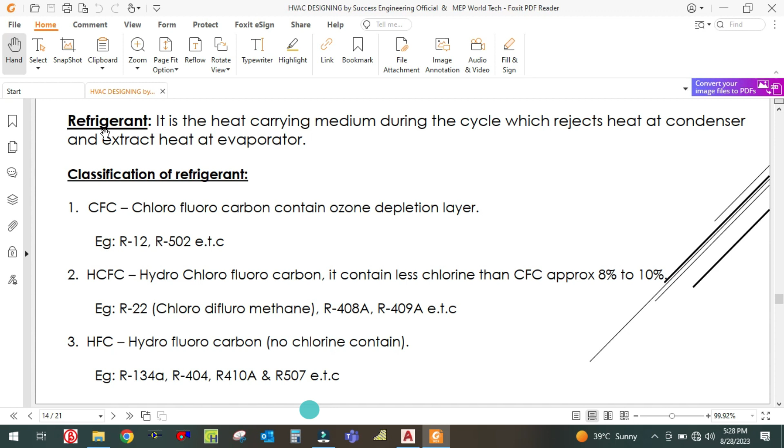As you can see here, this is refrigerant. What is refrigerant? Refrigerant is nothing but the heat carrying medium. It will carry the heat during the cycle, rejecting heat at the condenser and extracting heat at the evaporator. The AC works on a vapor compression cycle. This refrigerant fills the pipe, and it carries the heat during the cycle: at the condenser it rejects the heat and at the evaporator it extracts the heat.

The high pressure, high temperature refrigerant is discharged by the compressor and sent to the condenser. At the condenser it rejects the heat, because the condenser fan runs, pulls the outside air and throws it on the condenser coil. During this process the high temperature refrigerant rejects the heat and changes its phase from gas to liquid. Then it passes through the expansion valve and enters the evaporator, where it extracts the heat.

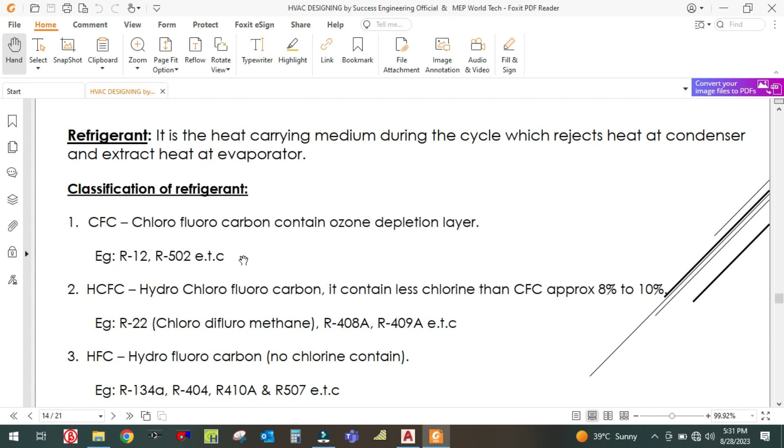Next one is HCFC, hydrochlorofluorocarbon. It contains less chlorine than CFC, approximately 8 to 10% less chlorine than CFC refrigerant. Examples of HCFC are R22, which is chlorodifluoromethane, and R408A, R409, etc.

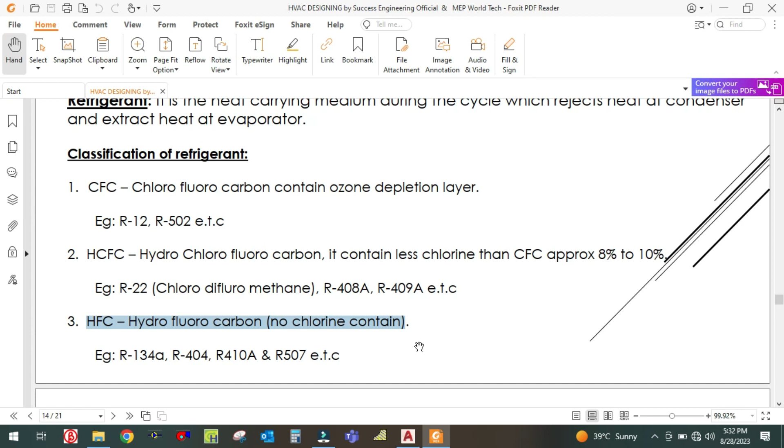And the third one is HFC, hydrofluorocarbon, with no chlorine content. Examples of HFC refrigerant are R134A, R404, R410, etc. This has zero ozone depletion since there is no chlorine, which means it will not affect the environment. So mostly nowadays we are using HFC refrigerant. R134A, also known as tetrafluoroethane, is from the HFC family.

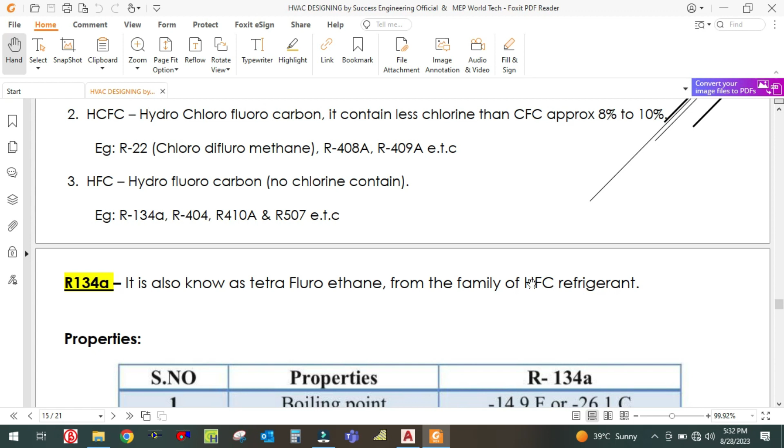Now we will see the properties of refrigerants. The first property of R134A is boiling point: it boils at minus 14.9 degree Fahrenheit or minus 26.1 degree centigrade. The return air coming from the room is around 18 to 24 degree centigrade, so it can easily boil.

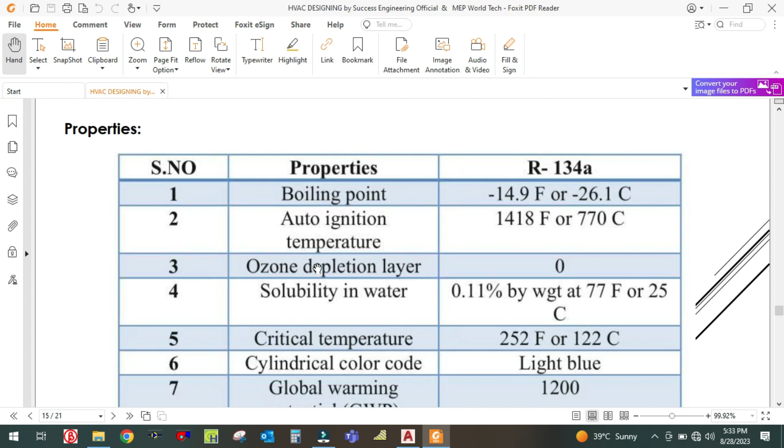Auto ignition temperature is 1418 degree Fahrenheit or 770 degree centigrade. ODP, ozone depletion potential, is zero for this refrigerant. It is soluble in water, 0.11% by weight at 77 degree Fahrenheit. Critical temperature is 252 Fahrenheit or 122 degree centigrade. The color code of this refrigerant is light blue and the global warming potential, GWP, is 1200.

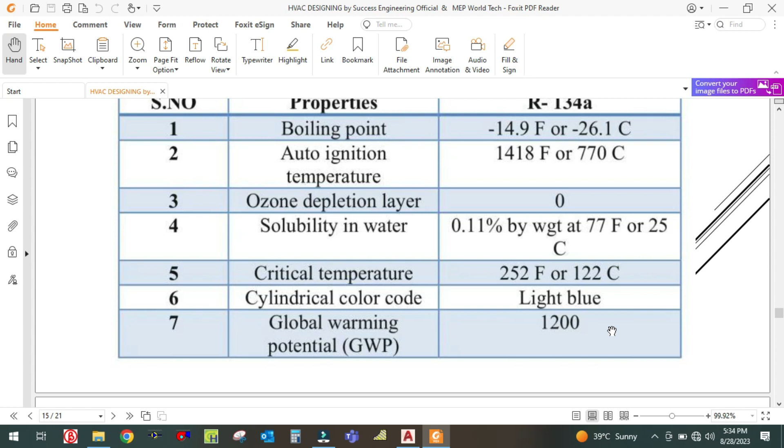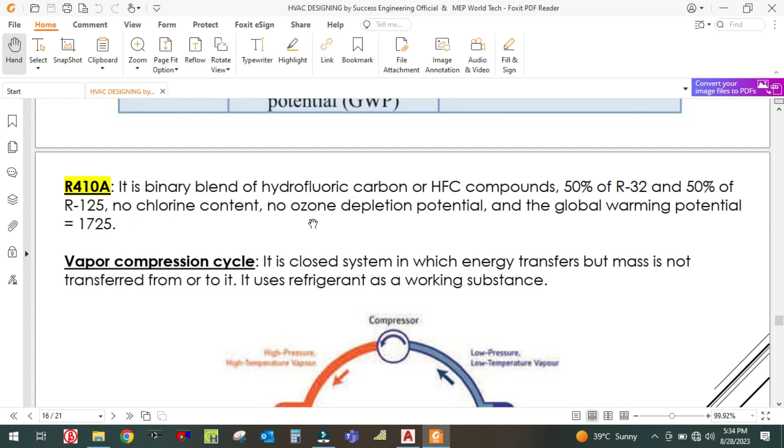Next one is R410A. It is a binary blend of hydrofluorocarbon or HFC compounds, 50% R32 and 50% R125. No chlorine content, no ozone depletion potential, and the global warming potential is 1725 for this refrigerant.

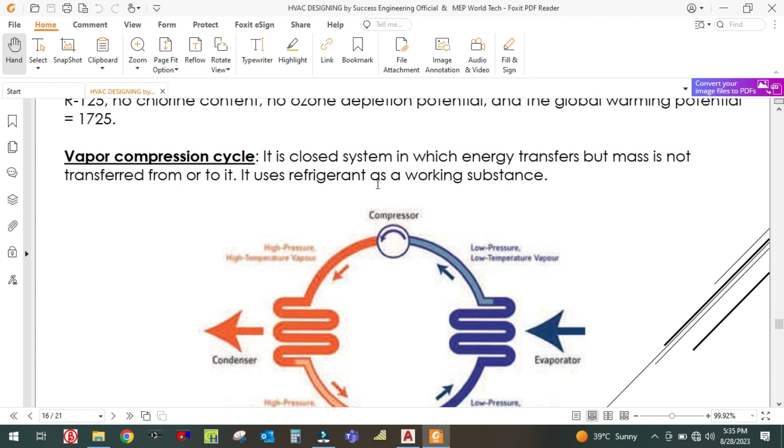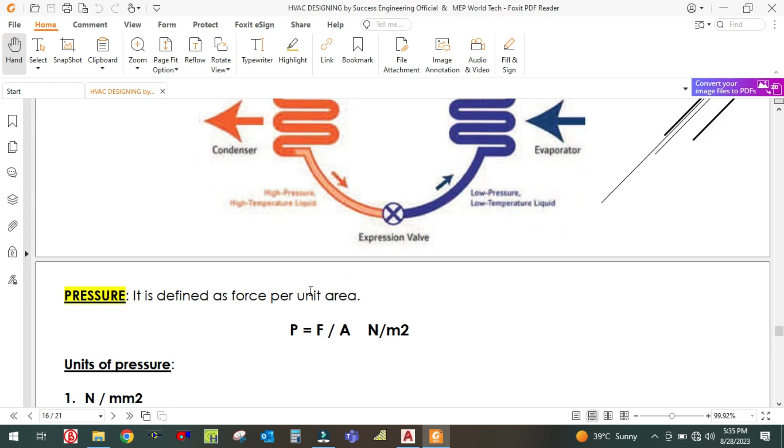Next is vapor compression cycle. It is a closed system in which energy is transferred but mass is not, and it uses refrigerant as the working substance. The vapor compression cycle has four components: compressor, condenser, expansion valve, and evaporator. Our AC works on this cycle. I will explain it in detail in the next tutorial.

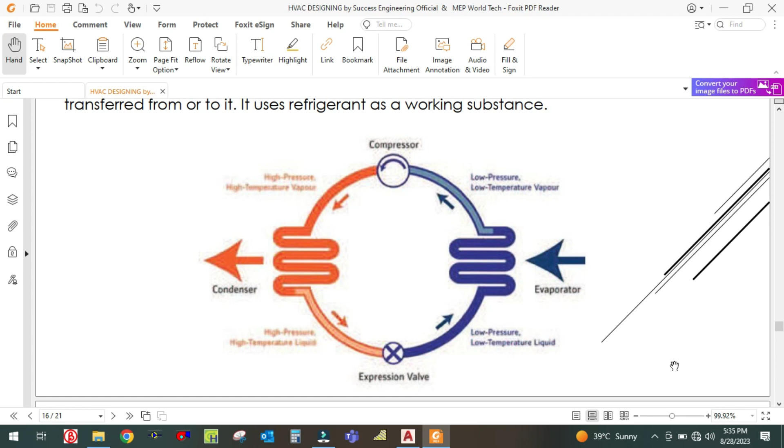This is a very important topic, vapor compression cycle. Our AC works on this cycle. So I will explain the function of these components and how the refrigerant is compressed inside this cycle.